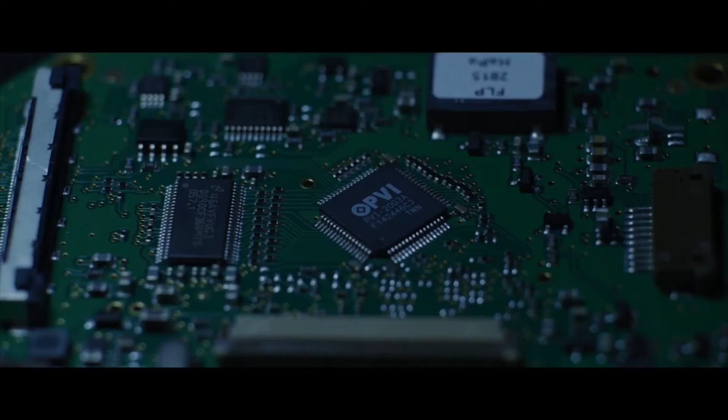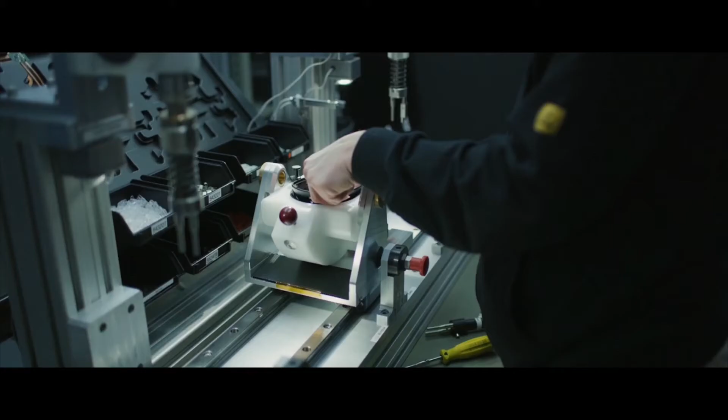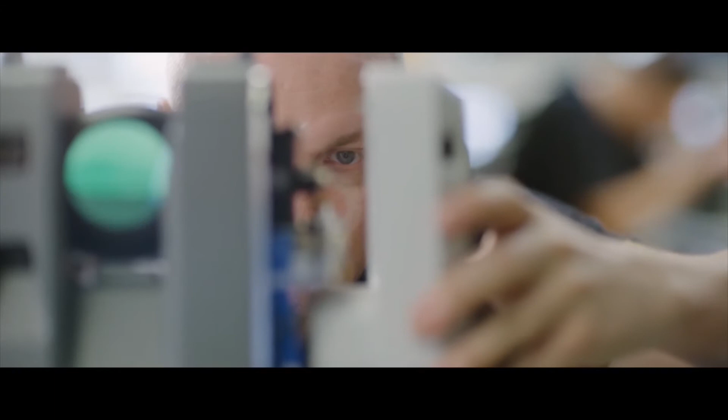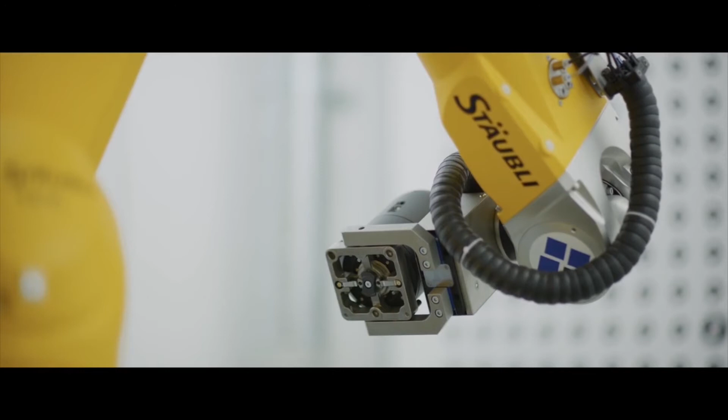We create it, accepting nothing as nearly right or good enough. Engineered for total certainty and tested to the extremes. These value-engineered products are the definition of exacting standards. The world has changed from quality to quantity. Why not have both? From the leaders in 3D reality capture, this is the power of scanning.

Thank you. The video underlines one of our features: reliability. And now, being more down to the ground, let me show you another video about the daily usage of 3D scanning by architects. Please enjoy the next video with my comments.

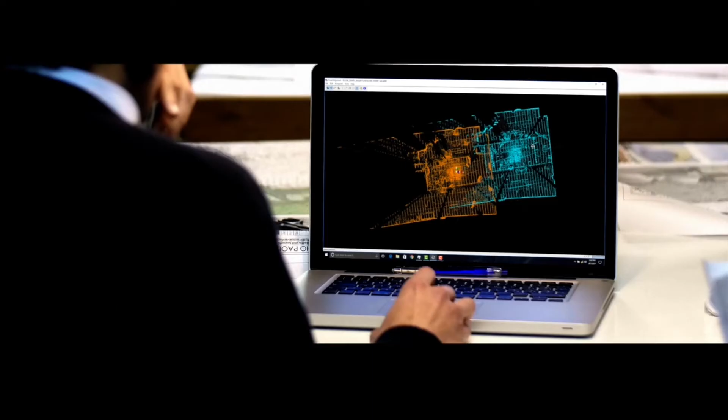The reality on a construction site may be different. This is a standard construction site. An architect is considering what he should do with the reality, how to copy it and how to redesign it. This will be supported by Leica Geosystems with the BLK360, a scanner which quickly, safely and accurately copies the surrounding reality. This is a dot cloud collected within a dozen or so minutes, which will be further processed. This is one of the possible scanners that can be applied, and this is the processing.

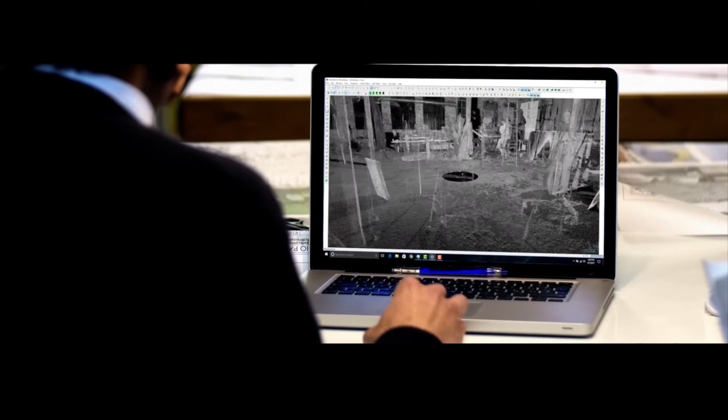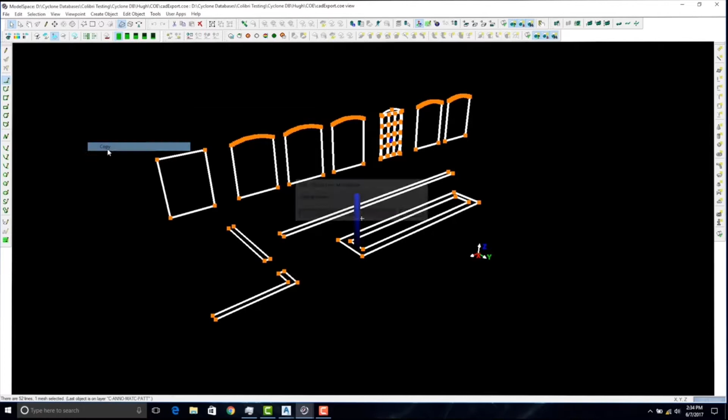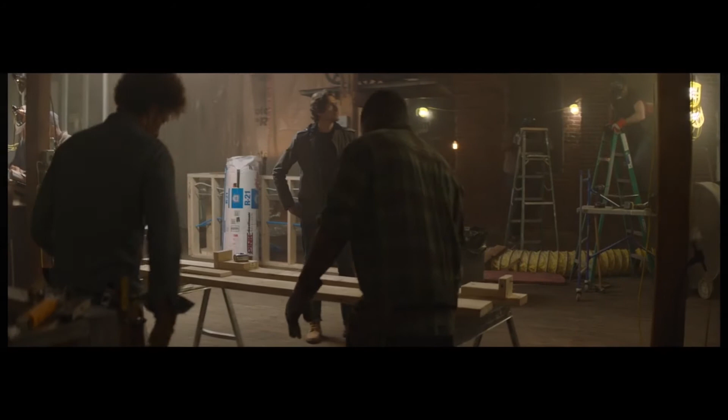So it is reliability, and designers or architects are happy. That's a dream. It's good to have a friend like Leica BLK360.

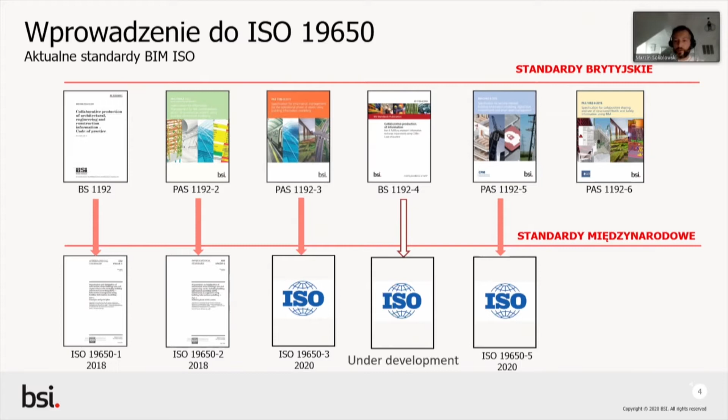This is a very important point: the Polish standardization committee takes ISO standards into account also, and we can benefit from it in our local situation. So it is very important we don't forget about documents which can support the operation of international ISO standards. Here I'm recalling various internet sources or even our national BIM standard PL. It is a very important source of knowledge as well, which we can use in the BIM process of preparation and setting up our organization for the BIM services.

We do encourage you to make use of various sources in order to gain knowledge about BIM, how BIM is acting. We have a whole range of elaborations regarding the ISO 19650 series, which explain how individual standards work. Now they are published only in English, but as a target, I assume that at a certain stage they will be translated into Polish, which will facilitate many people using it.

So if you're willing to start your adventure and work with standard ISO 19650, there are lots of additional sources supporting and helping us understand the idea of how individual standards work.

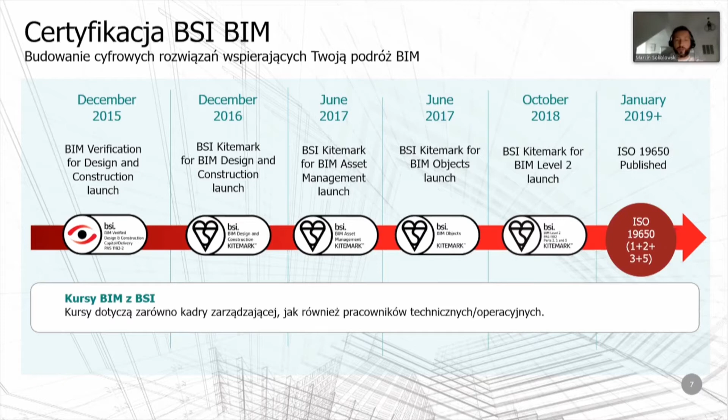What is very important, certification at this level of verification, this basic level regarding a specific organization, gives us certainty that the given organization is capable of delivering projects in the BIM way, that they have processes and procedures prepared for it, as well as competent personnel. This is actually the foundation for the operation of an organization in order to start the BIM adventure. So this is the first step an organization starting it can take.

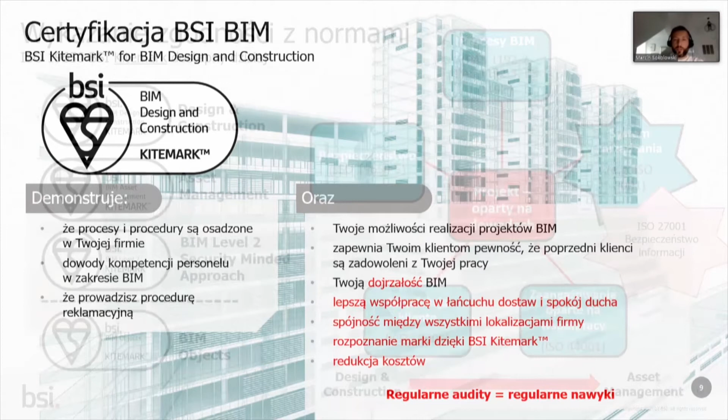If we already have BIM experience and have already implemented specific projects, we can use the Kitemark, which is valuable in this respect, that it shows maturity and real proof that we implemented the project in accordance with ISO 19650 standards. Here we are going into details, one project or several projects, based on which we are proving that we are actually doing these projects in line with BIM methodology.

What is really very important is that during the whole certification process, we verify various standards and compliance with them regarding specific certificates. A great proportion of them are based on ISO 19650, and currently this certification is being adapted to new standards freshly issued, I'm talking of extensions 5 and 3. Extension 4 will appear very soon, and it is addressed at various companies, both construction companies and design companies, as well as developers, commercial ones who can certify office buildings individually through Kitemark Asset Management, or suppliers of specific materials or construction products.

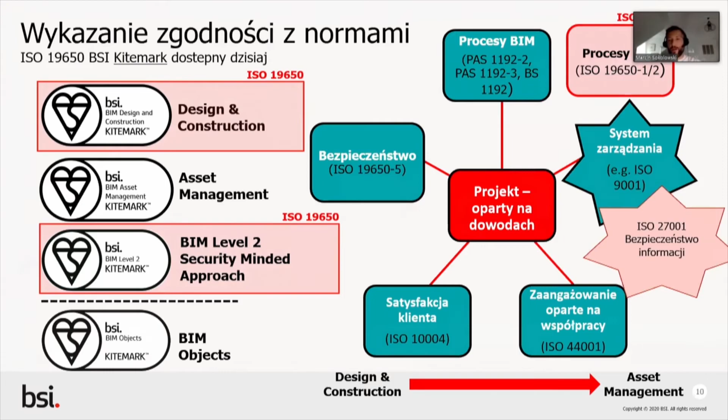And here we have the BIM Objects certification. Actually, every participant to the construction process will be able to find that scope of certification which will cover their range of certification in line with BIM methodology and in relation to ISO 19650.

And finally getting to a meeting where first verification of what we have in our organization is taking place, be it whether we go to the basic level or to Kitemark. Here we carry out the analysis, after which we give ourselves time, different depending on needs, and the given organization may still make those processes more efficient to adapt them so that at the audit it actually works. And here this initial analysis displays certain shortcomings, areas for improvement.

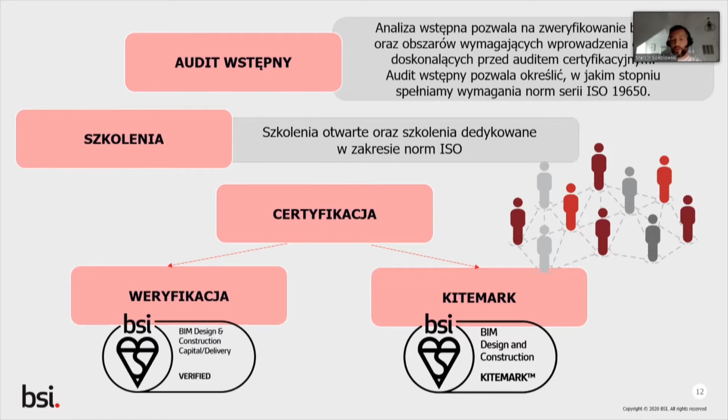We also check to what extent the standards from the series of ISO 19650 have been implemented. We can be using trainings if we need to strengthen our staff in this respect. And finally, we carry out a certification process, be it the simpler one where we do not have any projects implemented, or more complex, Kitemark. Here we leave the freedom for the organization to decide to what extent they are experienced to choose one or the other. Well, actually, these steps can be shortened to a simple 2-step process for obtaining the certificate.

I had this opportunity that working still in the UK, I was at the other side of the table, and I was preparing organization for implementation of BIM processes, which later were subject to certification. And I must admit that this is labor-consuming and time-consuming process, but significantly improving knowledge and competences in the whole organization and regarding methods of its delivery. So, by all means, it is worth carrying out.

And actually, we have 2 visits. Once the organization feels they are ready, 2 visits which have to take place. The first one is a visit where we get to know the areas and we get certain report of non-compliances which should be actually made up with.

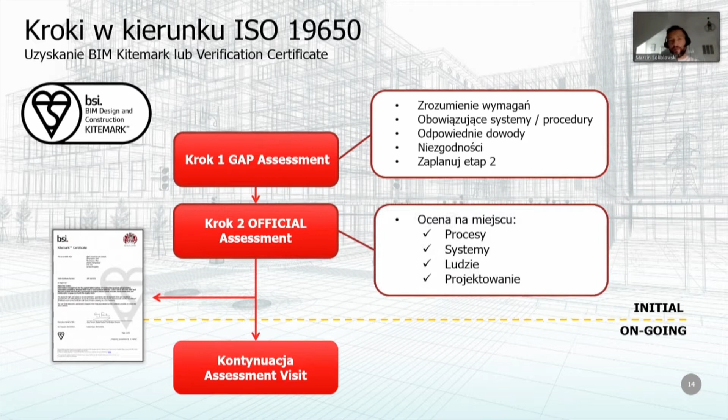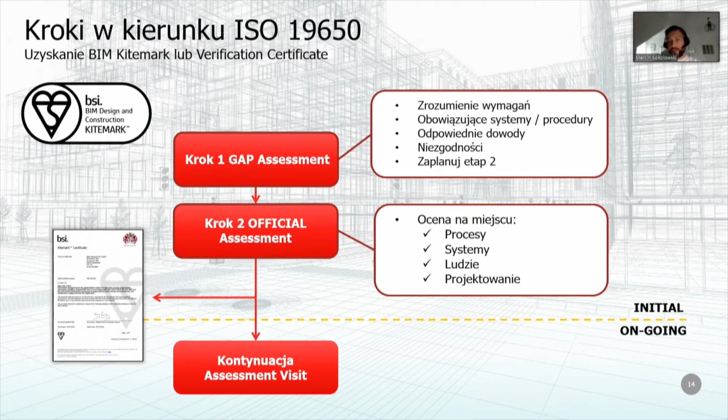And then second visit, the formal audit, actually verifying processes, people, competences in teams, and finally, certificate is issued for the period of 3 years, but every year there is a brief recertification audit held showing whether organization is developing in the right direction, so whether progress is going on in

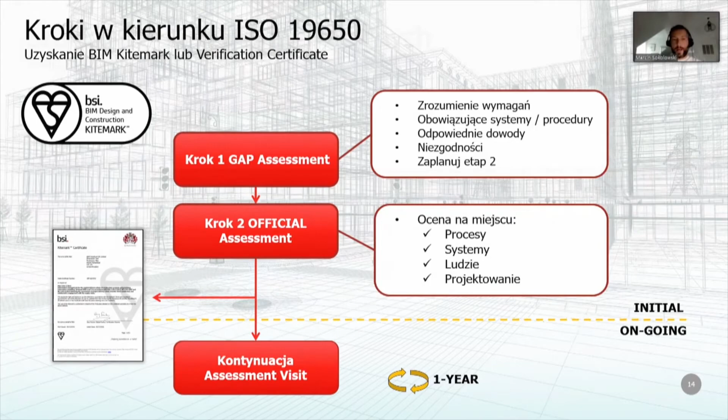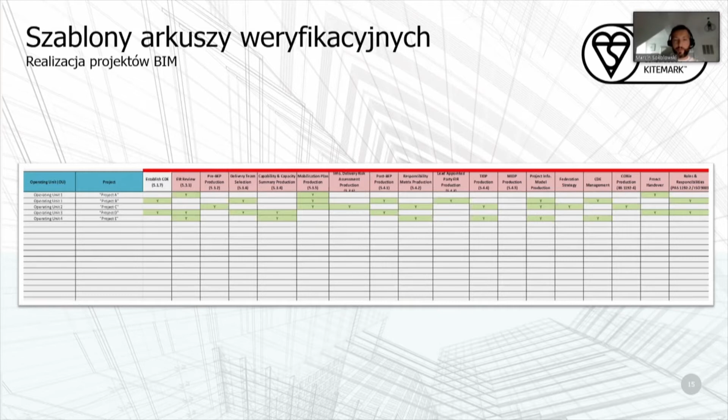development of BIM, and based on verification sheets the customer receives in advance. So here they act in full accordance with the standard, but at the same time the customer is very well taken care of in this respect.

And what we can actually obtain, we can show shareholders that the company is working effectively and keep improving their operations. It will definitely reduce costs and increase efficiency and broaden the market opportunities. So actually going in for public tenders and obtaining new people, because companies that really put stakes on new technology on BIM, they actually experience it.

We have really many customers from various geographic locations, so I do encourage companies from Poland who would be interested to get in touch with us. I will very gladly help you and suggest how to start your path with certification, and I wish you success in further BIM activities. Thank you very much.

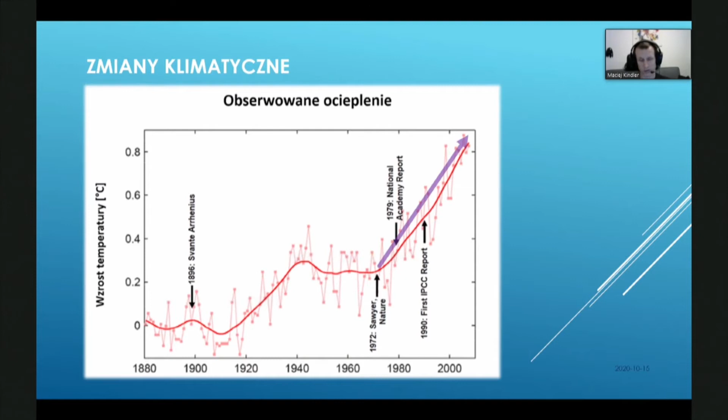I wanted to draw your attention to warming. Across thousands or millions of years, fluctuations of temperature took place, temperature going slightly up, slightly down in various periods of time, but the increase of temperature noted over the recent 40 years is unseen in the history of our planet, and it results mainly from our activities. How does this influence our life? I'm not doing this to scare you off, but just to make you a bit more aware.

For years in Europe, but also worldwide, we face a huge migration problem. It results from the fact that certain parts of our globe stop being livable. This is not serious in our European conditions, but we have a constant problem with providing necessary resources. And biodiversity loss keeps going on. It's not only a result of temperature increasing, but it is a derivative thereof. And the acidity of oceans is increasing constantly.

Oceans are a sort of free refrigerator regulating the temperature of the earth, and the acidity level makes this fridge work less effectively. So some organisms are dying out or find it difficult to live. And a noticeable influence is that on our everyday health. You, I guess, have your own experience related to smog and air pollution. This is a direct result of our activity and CO2 emissions.

There is also a question of economic influence. These are only estimations, of course, and estimations can sometimes be very far from the truth over a period of a couple dozen years. But economists agree that the crisis related to climate change, going on like this, will have a significant influence on the world economy, and it will be reducing it quite significantly. This may be a limitation to a degree comparable to the 1930s. Well, that swing was periodical, but now it will be a permanent state, impossible to reverse.

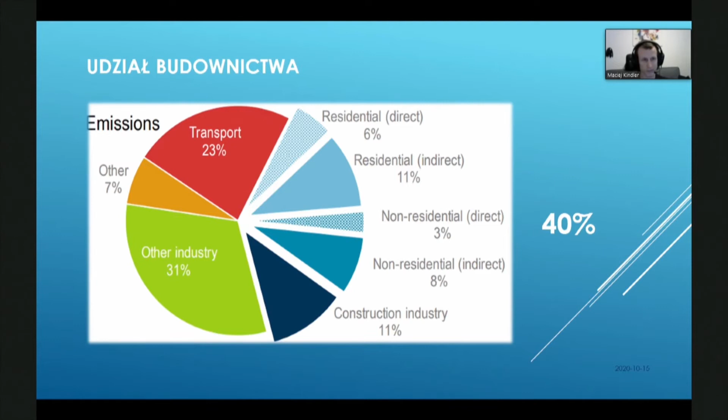Well, as a point of interest, let me share with you that recently I read, possibly I confused something, but I read that China every 3 years uses the amount of concrete consumed by the US over the whole 20th century. So this influence of construction is really vast.

So where does BIM come from? BIM appeared here because of the British government making the decision to develop railway infrastructure in the HS2 project, which is a highly ambitious plan to build a new high-speed railway on the scale of the whole country. The project is aimed at connecting 8 out of the 10 largest cities. Within this project, hundreds of kilometers of new railways will be built, around a dozen new stations, and practically a new network of connections. This is a project planned for the next 32 years, with a budget of over £100 billion.

With a project as vast as this one, you can already make some influence on the market, on how these projects are being implemented, and through such a project you can create new quality. And in this case, the British government, deciding to build this infrastructure, set forth some limitations, and the first one was for this infrastructure to influence the environment as little as possible and to provide the greatest limitation to local infrastructure.

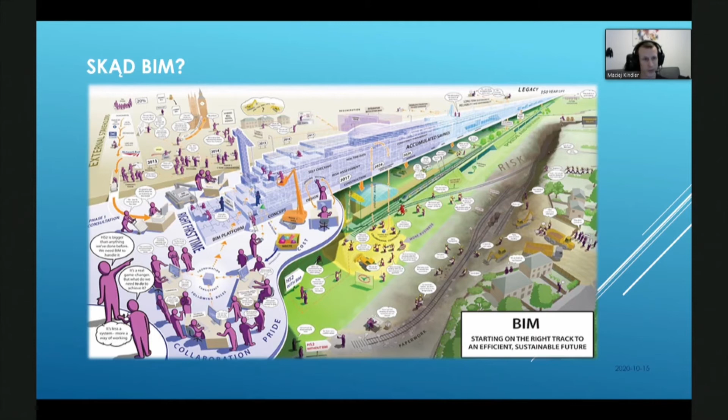So, in response to this strategy, we, as contractor, have prepared our own architecture and a plan on how we will be implementing it. Now let me make you more familiar, very briefly, with what this architecture looked like. I will do it based on specific examples, solutions, because this is easier to visualize. In our case, the CDE function was played by ProjectWise, and this was the core regarding project information.

Around ProjectWise, the whole process of BIM modeling and CAD was built, and the programs used for modeling in case of this platform were AECOsim, OpenRoads, and MicroStation, and these programs were directly connected to what is called managed workspace. This is an environment providing the whole range of templates, libraries, references, standards, which, when creating a BIM or CAD file, are read into the system immediately, making it coordinated and holding a minimum standard regarding the data structure of elements created later.

Yet another element was iModel Transformer, or FME, depending on which one we are talking about, which allowed us to edit metadata and enrich them with additional information. And the last element was the viewer, and in this case we talk of Bentley Navigator, but it may be any viewer capable of consuming that load of information. And in the case of GIS, it was ArcGIS viewer. On top of that, Synchro and CostOS were connected. That means programs which allow implementation of 4D processes, planning, and 5D cost estimation.

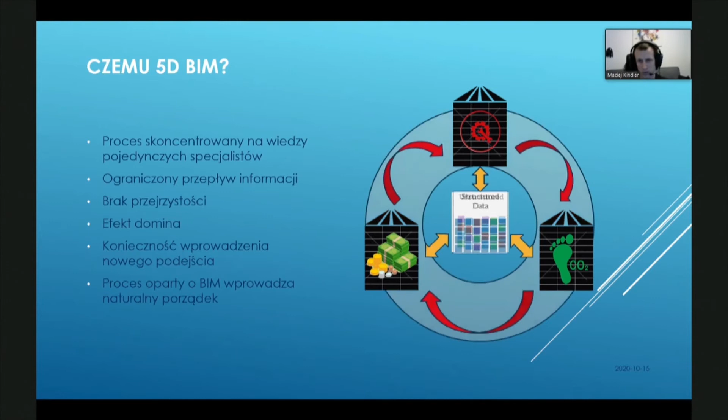So why 5D BIM? First of all, it was included in the customer's requirements. The customer said that they expect the cost estimation to be built based on BIM models, but it is not the only reason, and it is not the most important reason. Most important is that in the cost estimation process so far, as well as in calculating carbon footprint, everyone was bunkered and based on their own data set, which was not necessarily uniform with the rest, and left the risk that the data would not be legible, would be incomplete, and first of all, resulted in lots of data collecting activities being duplicated. Therefore, we suggested for the cost estimation process to be based on BIM models and for it to become the basis for calculation of carbon footprint.

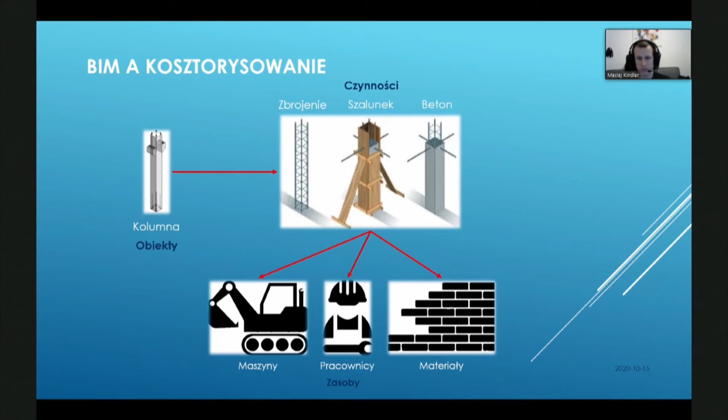How did we organize this whole process itself? Traditionally, a list of activities is collected when cost estimating and analyzing a project. You collect the list of activities which are to be carried out during this project. In our case, we added one more step. First, we identified objects or groups of objects, because we would not be cost estimating every column alone. So we identified groups of objects, and only those groups of objects, through specific templates, gave us a list of activities to be carried out, which at the end were cost estimated based on the resources and man-hours or machine hours and material.

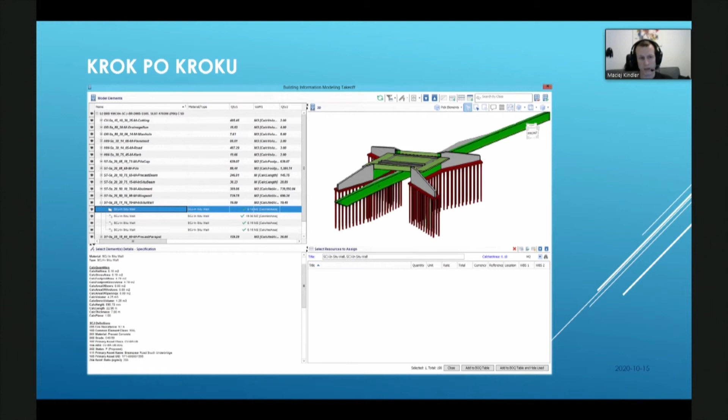And additionally, what is most important, this element has been fully dimensioned. So high-class, high-grade systems for 5D cost estimation, having the BIM analyzing capacity, automatically break down these models into elements and do the measurement. After this, we create a list of our activities based on those templates.

I have a template for pilings, where I have to specify individual elements like grouting, cutting heads, and so on and so forth, and then I connect it with the elements of the model, creating a highly transparent structure, because whatever I select from the cost estimation is automatically highlighted in the model, and the other way around. So I have great clarity where my list results from.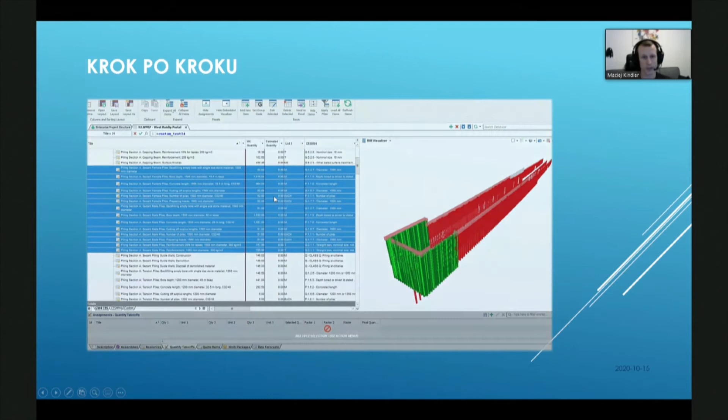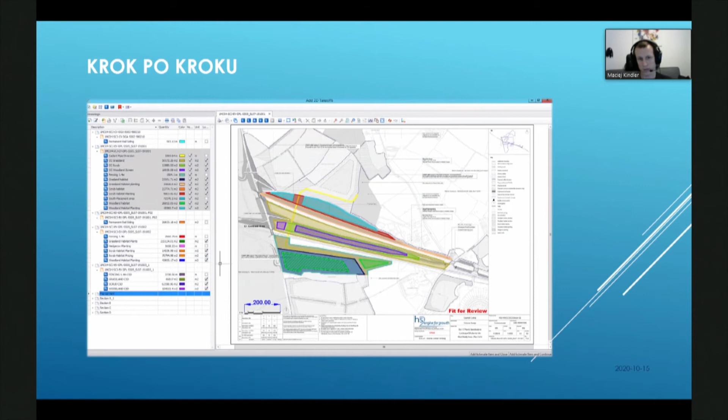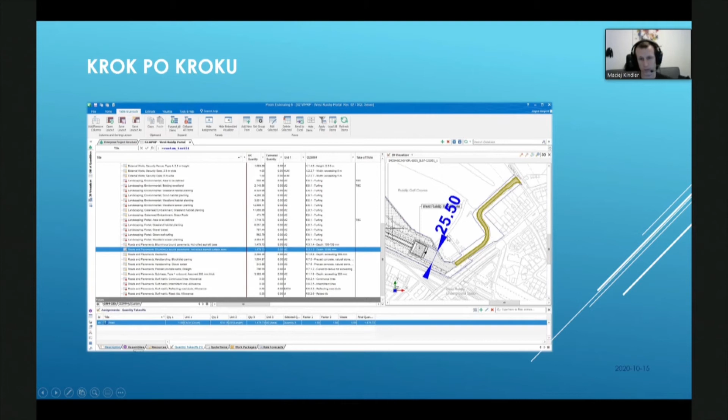And in spite of many years of work with 5D cost estimation, I'm one of the last people who would tell you that 5D and the BIM model are all you need. So we are still at the stage where part of this measurement must be made more complete based on drawings. And after that, in the same environment where we have cost estimation, we make a connection between the drawing and the specification. And we add all activities for cost estimation which have been dimensioned and connected to appropriate elements in the drawings or in BIM models. So it is a highly transparent model for work.

What does plus mean in all this? So, as we know, everything that has been designed must be cost estimated. And at this moment, we have a connection between a naturally structured database, being the BIM model, especially if you introduce a certain standard for naming and coding, for example Uniclass, and the cost estimation built based on templates, and also being coded. In our condition, it was something called a method of measurement, but it is the equivalent of Polish KNRs. So thanks to this, we obtain yet another structured database.

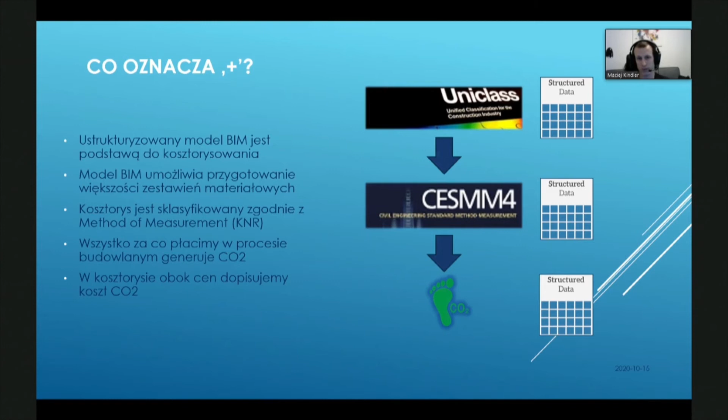And to it, in a similar way, we allocate unit prices. We also allocate CO2 costs. And based on one template, we automatically calculate both costs of construction as well as carbon footprint. And thanks to this, when the project is changing, we have the possibility to compare and obtain immediate results, telling us to what extent the change introduced increased costs and influenced the carbon footprint.

Briefly more about the carbon footprint reduction, maybe 3 points. In this process, we aim at creating a process which will allow regular measurements, namely following the progress of designing or the introduction of changes and various design proposals. And we want a situation in which, once such a design solution is proposed, we are able to estimate as fast as possible its influence both on cost and on carbon footprint, in order to state whether it is beneficial from one or the other perspective. And we aim at reducing through this measurement both cost and carbon footprint.

And of course, the target, the most demanded effect, is a process in which, as designers add further elements to the BIM model, at the end of the day or week, in practically real time, we obtain information about how the cost of the given building increased or decreased and what its influence is on the carbon footprint.

When calculating carbon footprint, the life cycle of a building has been broken down into 4 stages. We talk of the stage of production of materials: producing the material in factories, transport to the site. Then we have the stage of construction. That means all that is happening within our construction site. Then the stage of use, and finally the end of use of the building, including demolition.

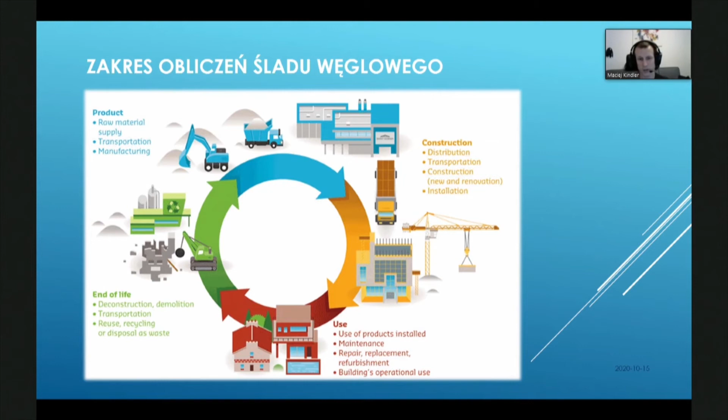In our 5D Plus process, we address only and solely the first two stages, production and construction. We are not trying to compete with BIM 6D, focused on optimization of the use of the building and optimization of the life cycle during use of the building. It is only an addition to it.

So, in a simple diagram, it looks like this: the binding element is the cost estimation built based on BIM models, to which unit prices and prices of CO2 are added from the library they are collected in. And how is the library created? The library is grouped through methods of measurement. So in our case, it would be grouped based on KNRs, and it merges the cost estimation and the value of CO2. And this is done through the code number of the method of measurement and the unit of measurement, because the combination of these two values results in a unique input into the library.

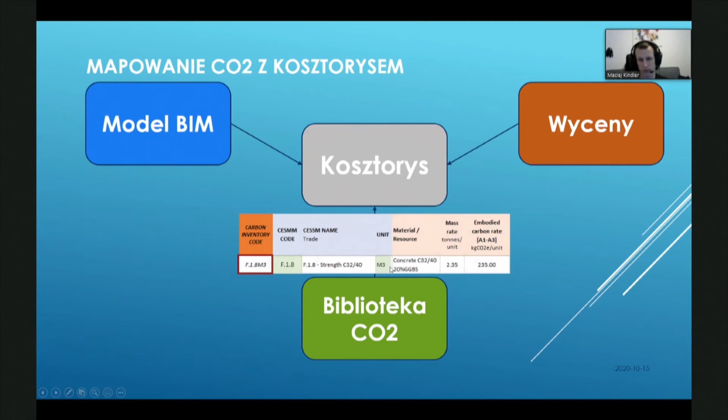In our case, it could be made through KNR and unit of measurement. Well, KNR could be sufficient, which results in an integrated process of carbon footprint calculation. The last element, that means results: in our project we managed to

for the first time at such scale, carry out full calculations of the carbon footprint. Thanks to this, we were able to determine the distribution in individual stages of implementation of the project, what is the influence of the carbon footprint, and what materials have the biggest share in it, which automatically allows us to focus our attention on optimization of design solutions using these materials.

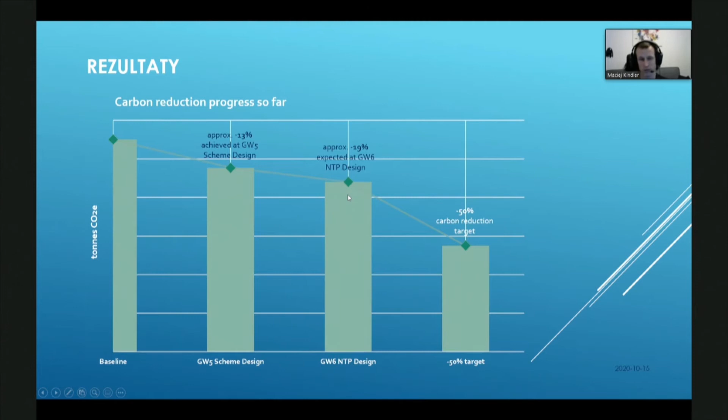And the objective, in case of the customer, was highly ambitious. The target was put forth to reach a 50% reduction compared to the initial project. This has not been achieved because we are only at the first stage of implementation of the project. So construction design has been completed, but already based on it, through individual stages, we managed to reduce the carbon footprint by almost 20%.

One warning: why should you take care of this? At least at this moment, we have no alternative. We have only one planet we can live on, and there is no escape from it. If we pollute it to the level where it is not livable, there will be no return.

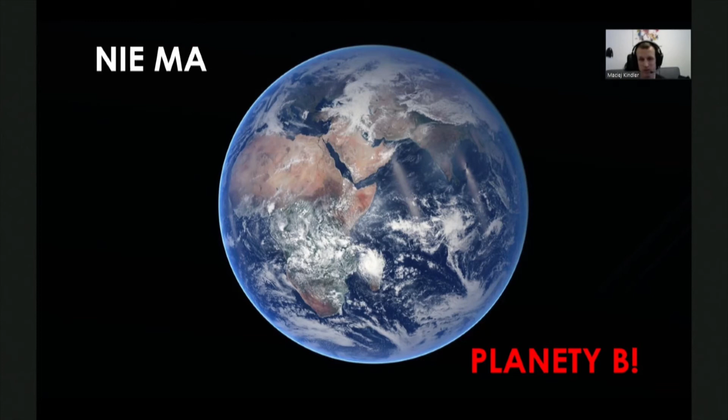And each of us, I hope you as well as engineers, BIM specialists, can influence it, not only in your everyday life by reducing various types of activities or using some alternatives for them, but also in your work. And I do honestly encourage you to think about this also at your work, and to try and design and implement projects in a way which will allow future generations to have where and how to live.